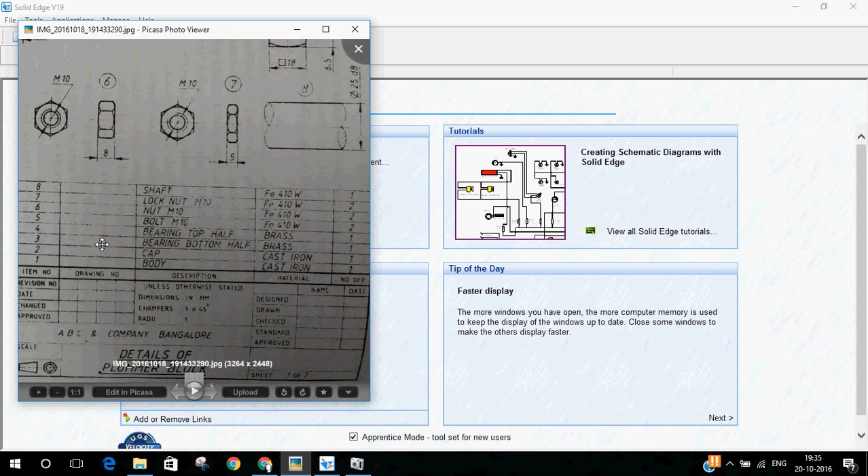In this video, I'll be doing the remaining four parts, that is a bolt, two nuts and the shaft. We'll start off with the bolt, which is the fifth part. As you can see, it is a square headed bolt, not a hexagonal head. We'll start it now.

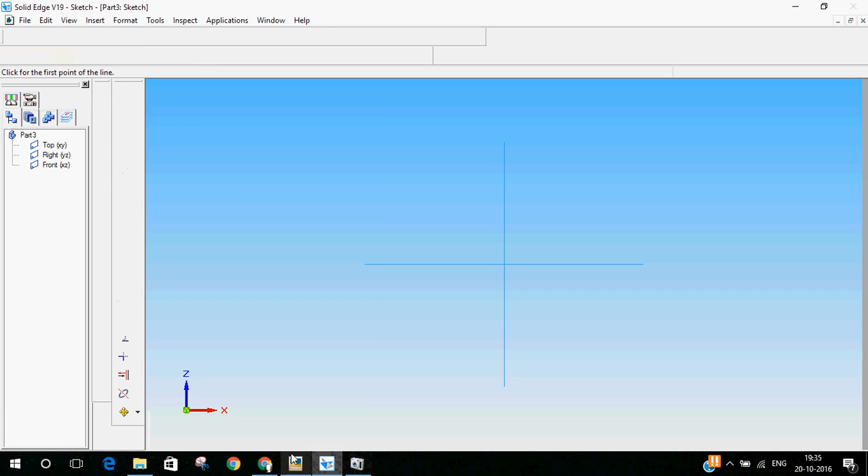I'll select the sketch on the front plane. Now we'll draw the basic dimension. This is a square bolt. So first I'll draw a square. I'll use the rectangle option to draw a rectangle first. Then I can make it a square. The dimension is 18 mm. 18. Even this should be 18. I'll make it symmetric about the axis.

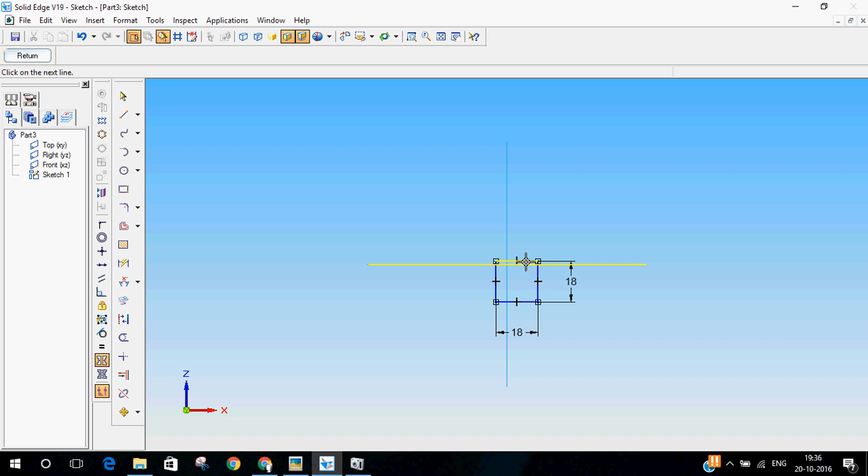Then even these two. To make these two symmetric, you will have to choose the y-axis, but already the x-axis has been selected. To change the axis, you can select the symmetric axis option and then set the y-axis as the symmetric axis. Now you can choose the two sides. Sorry, you can set the symmetric axis first, and then now select the two sides that has to be symmetric.

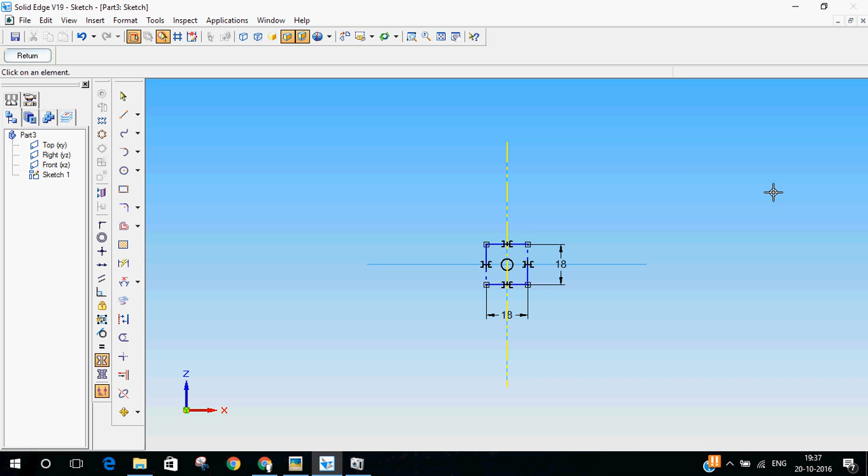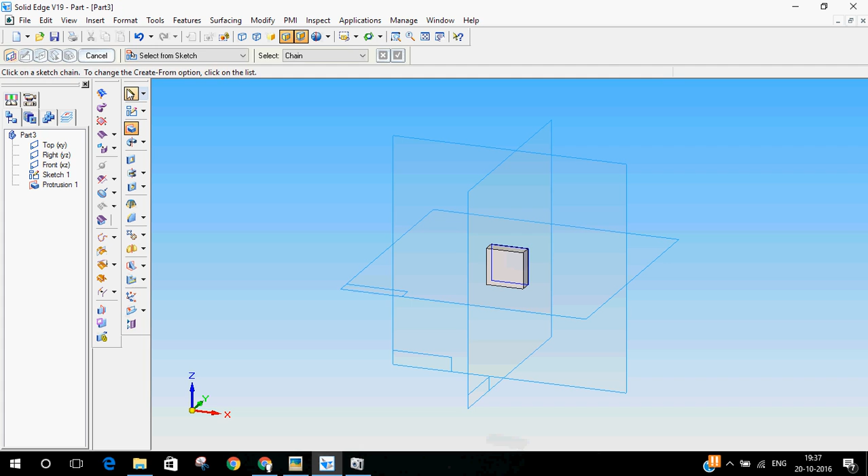So now it is done. Wait a second, there is some error there. Okay, so now this is done. Both the sides are 18 mm. I'll return from the sketch. Now the thickness of it is 6.5 mm. So I'll select the protrusion option and protrude it 6.5 mm. I'll select the sketch. 6.5. Okay, you can do it on either sides. I'll do it on the outside. So the head is done.

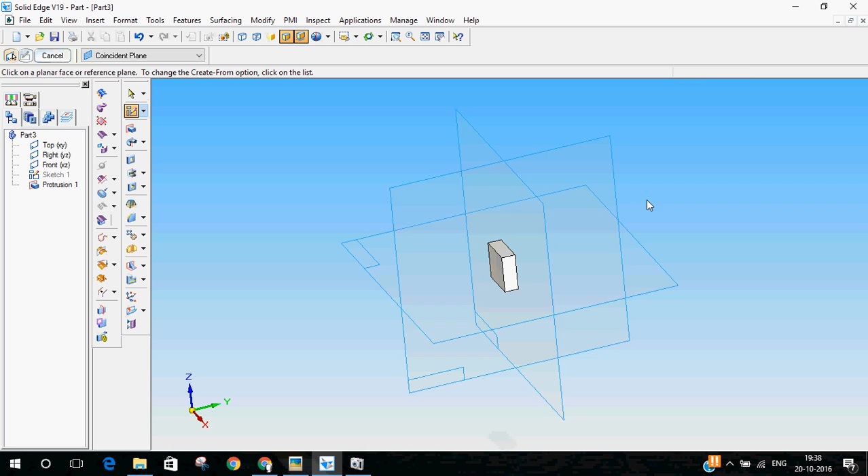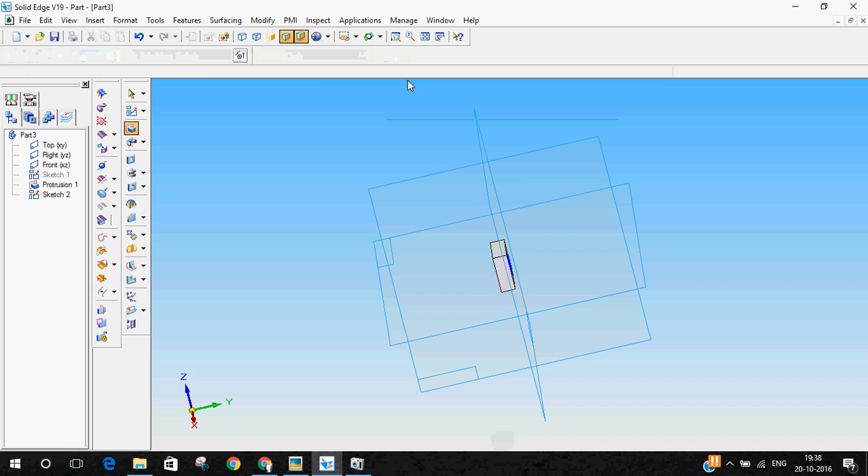Now we will have to do the shank and the threaded part. That is of a height 75 mm and the diameter is 10 mm. So again I'll select sketch on the front plane. Now I should draw a circle of 10 mm diameter. So the circle is done. Return from the sketch. Now select protrusion, select the circle, protrude it on the other side of the head for 75 mm. So this is also done.

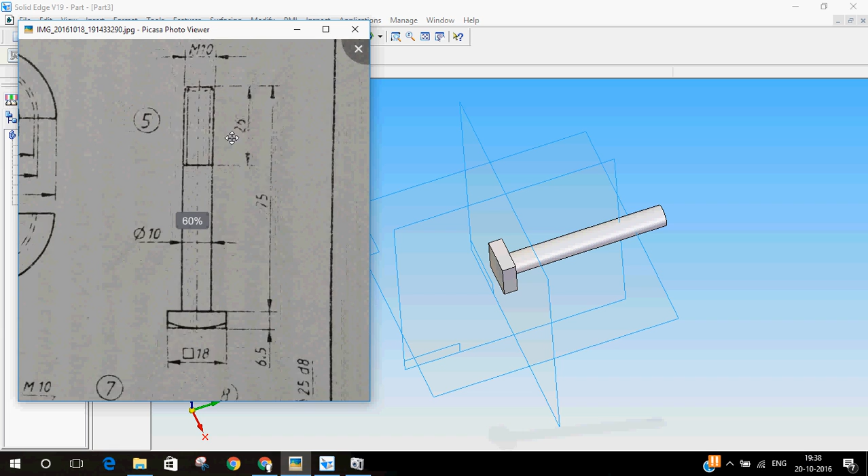Now we will have to do the threads. The whole bolt is not threaded. Only 26 mm from one edge has been threaded. So we'll do that. Under the hole command, you can see the thread option. Select the thread option. Select the straight thread. Now you will have to select the cylinder which should be threaded. Select the cylinder. Select this edge.

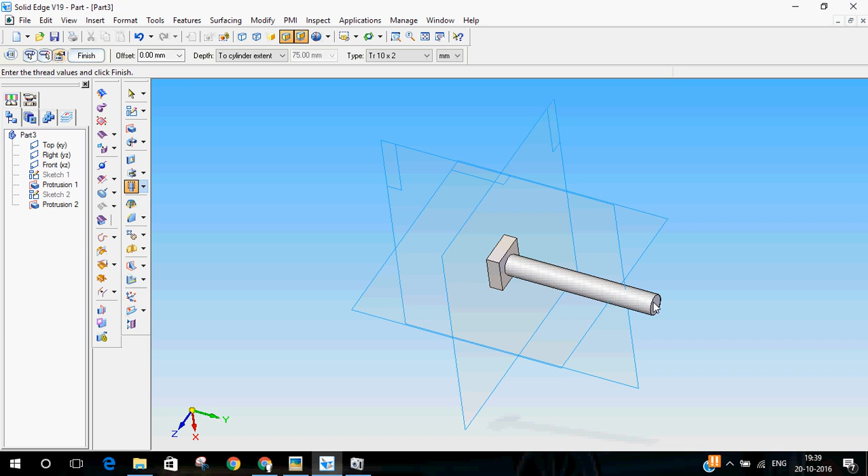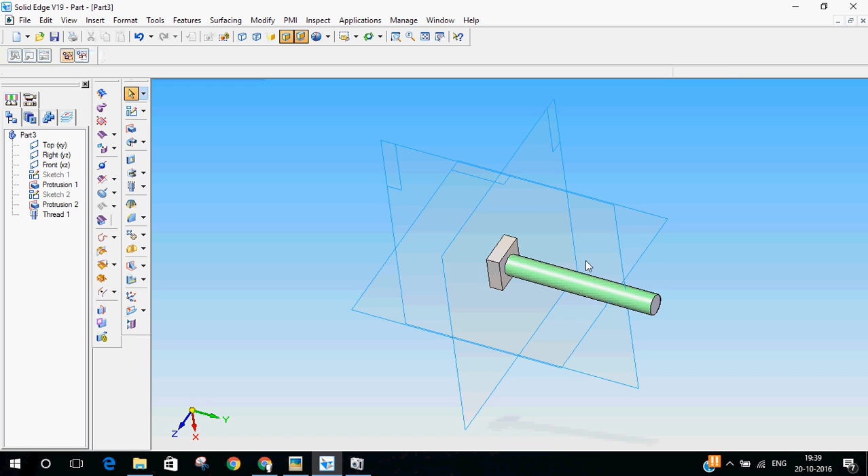Now you have to set the dimension. Offset should be 0 mm. Depth is select finite value and the distance is 26 mm. Now the type of thread is M10 and then you can click on finish. So the threads is done for a length of 26 mm and the remaining is a plain shank.

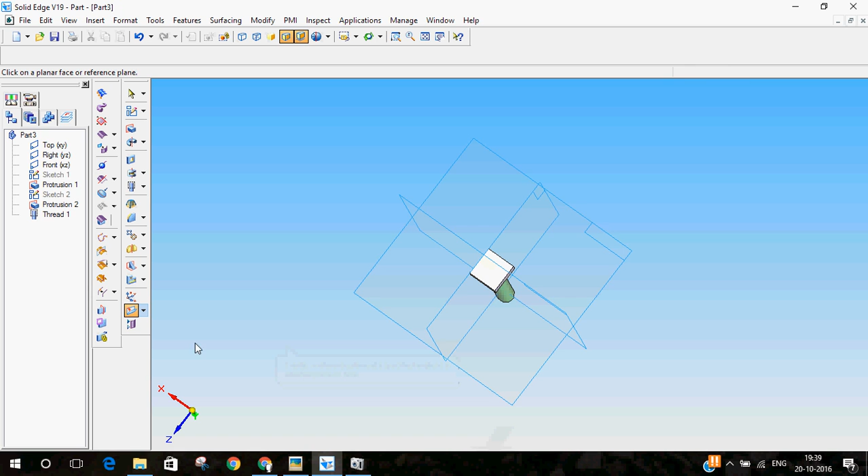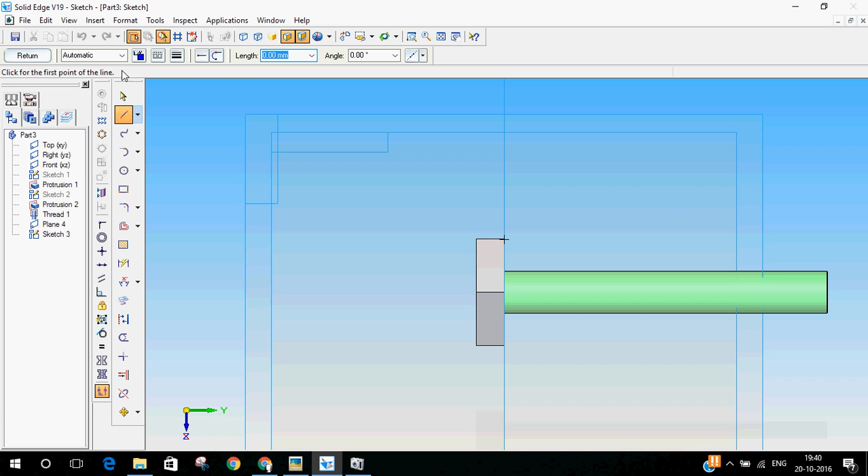Now what we have to do is we have to give this small chamfer on the bolt head. To do that, we have to create a new plane, an angled plane. Select these two planes, then a line appears in between. Click on the line. Now you can see a new plane. Create it at an angle of 45 degrees. Now select sketch on the new plane. Okay, before doing that, let the plane be there.

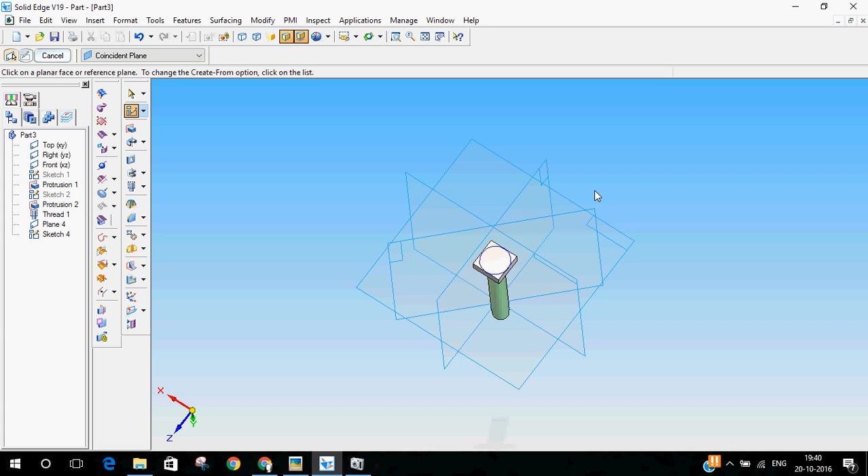Select sketch on the top surface of the square. Now draw a circle that is tangential to the edge of the square. Now return from the sketch. Now select the sketch on the new plane that you have just created. Now what you have to do is create a line. The circle which you created in the previous sketch is shown in this view also.

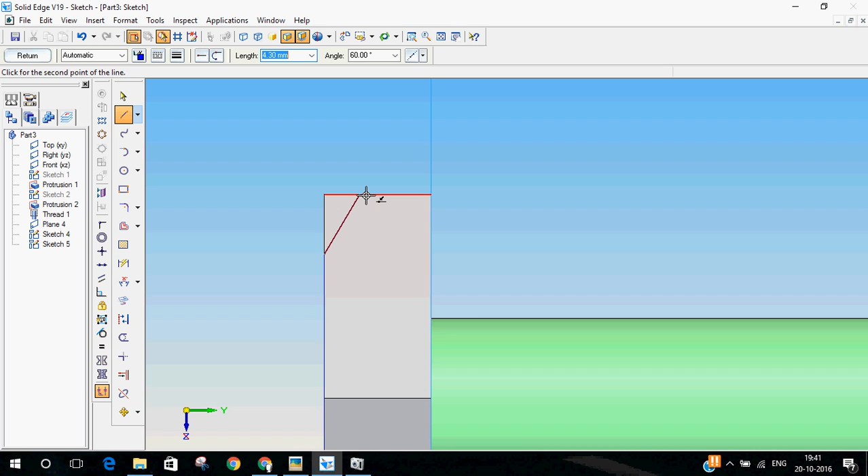From the edge of the circle, draw a line that is about 30 degrees. This angle will be anywhere between 15 to 30. I'll just choose 30. Sorry, 30 from the vertical. That means it should be 60 degrees. And then draw it till the edge. Then you can just close the profile outside the square. Now you have to draw the axis. To draw the axis, just draw it in the center. Now return from the sketch.

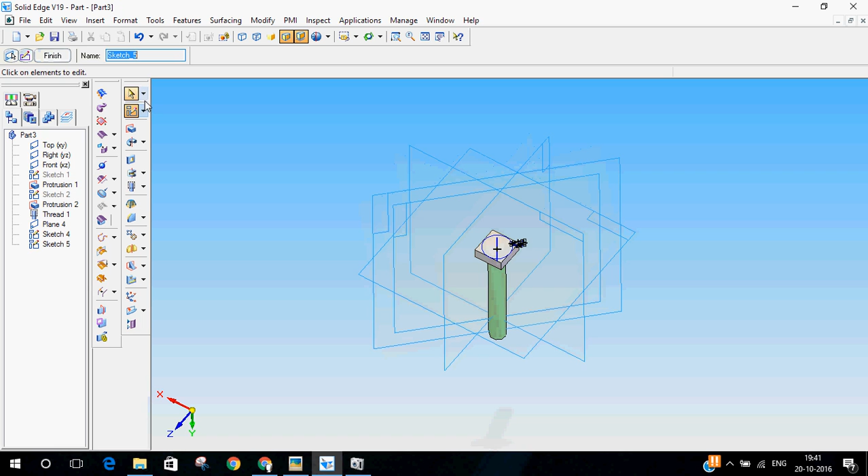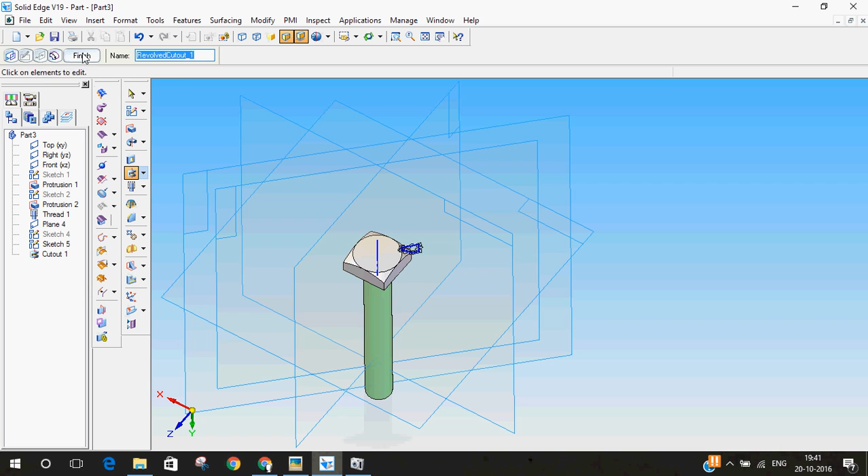Now you will have something like this. Now you can hide the previous circle sketch. Now you have to select revolve cutout. Select this profile and select the center line as the axis. Then revolve it for 360 degrees. So this is also done. Now you can see we have got that chamfered look which is shown here. Okay, so the bolt is done now.

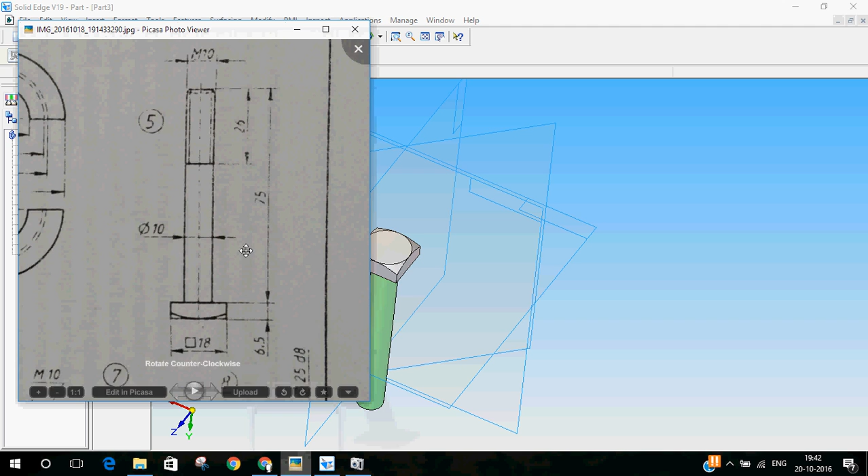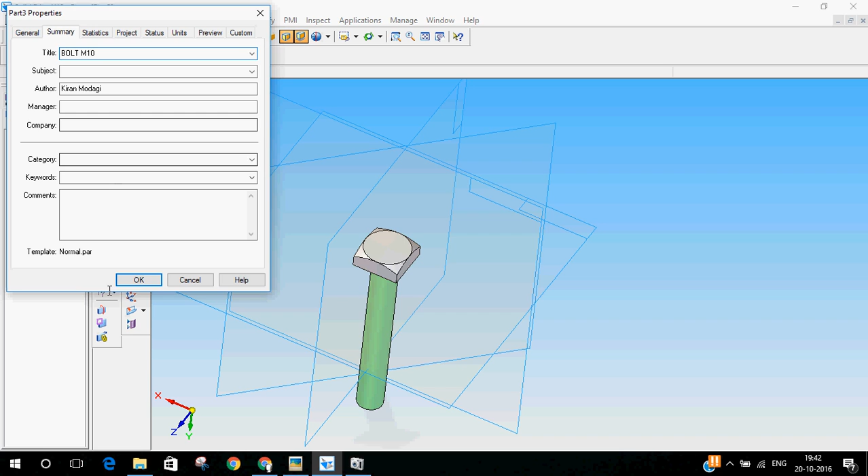We'll set the material and save it. The material is given to be FE410W for all the 4 parts. So let me set the material. It is FE410W. Now I'll save it. The name is Bolt M10. Okay, so the bolt is done now.

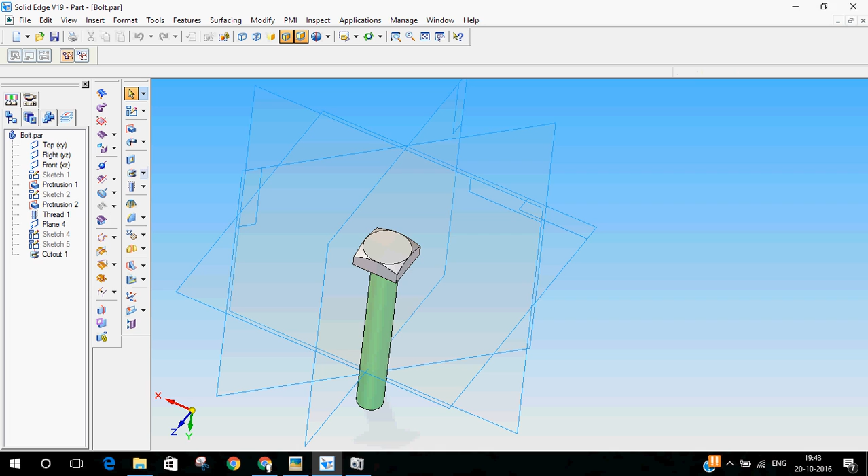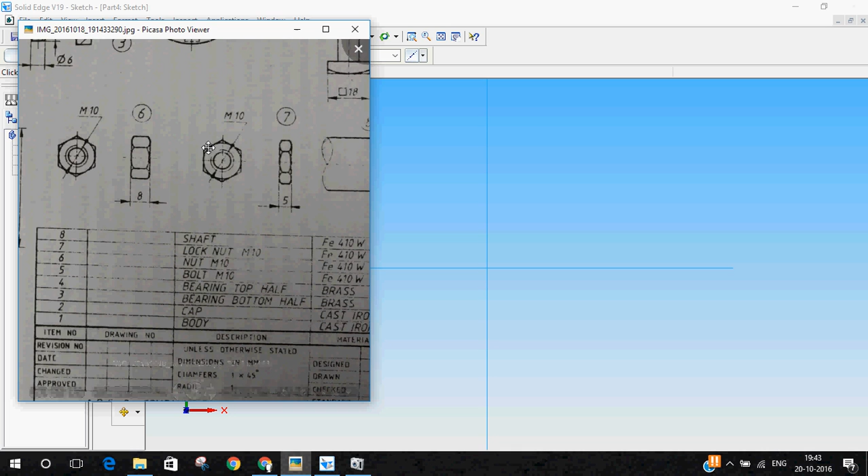The next is 6th part, that is the nut. I'll close this and select a new solid part. Now we'll do the nut. There are two nuts which have the same profile and dimensions, but only the thickness vary. So what I'll do is we can use the same profile to do both the nuts. To do that, first select sketch on the top plane. As you can see, it is a M10 nut. So draw a circle of 20 diameter.

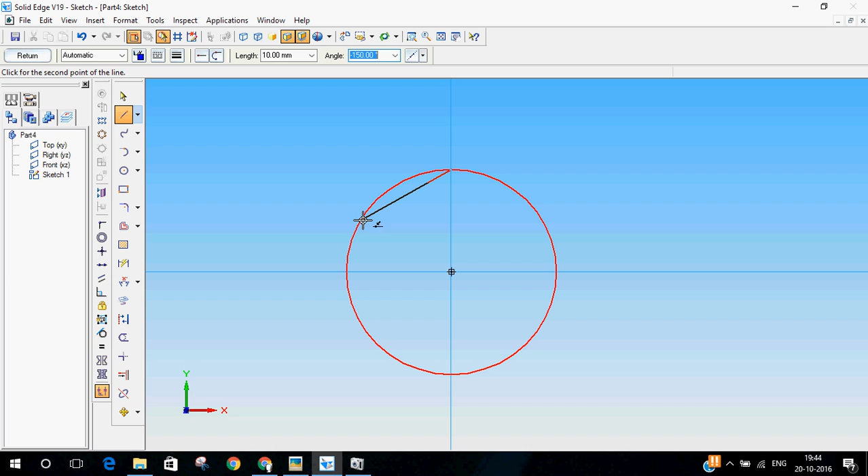And then now zoom into it. Then we have to draw a hexagon inscribed in this circle. Now select the line command. Start from the top of the circle. Give dimension to be 10 mm. And then click on the circle. You can see the angle is 150 degrees. And then go vertically down till it touches the circle again. Then continue it till you finish the whole hexagon.

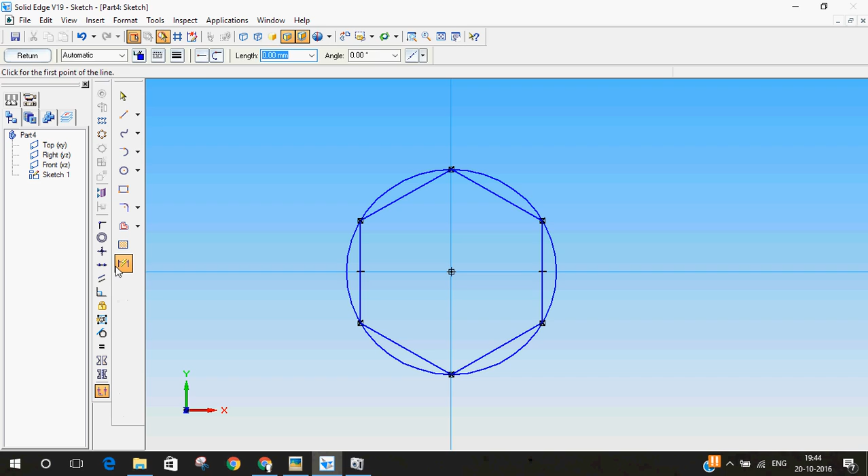So the hexagon is done now. Now I don't need the circle anymore. I'll just delete it. Return from the sketch. Now select protrusion.

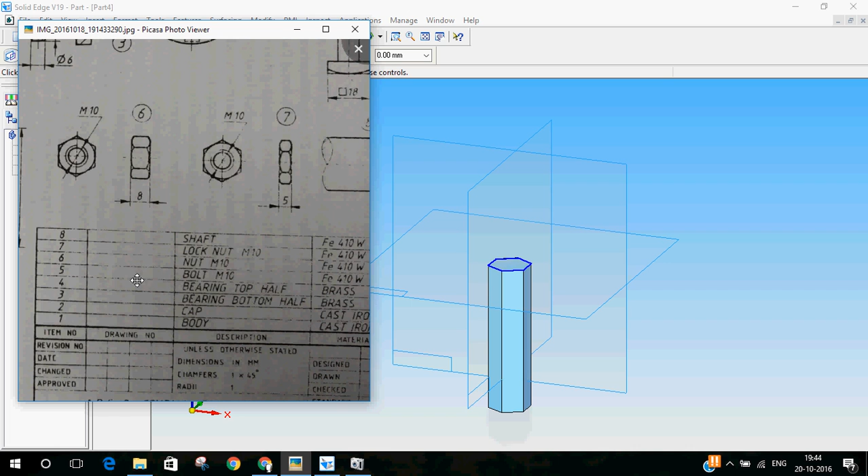The protrusion width or the height, for the 6th part, is 8 mm. So I'll protrude 8 mm on both sides. Select 8. Okay, 8 mm is done. Let me hide the sketch. Now we have to create an M10 hole on it.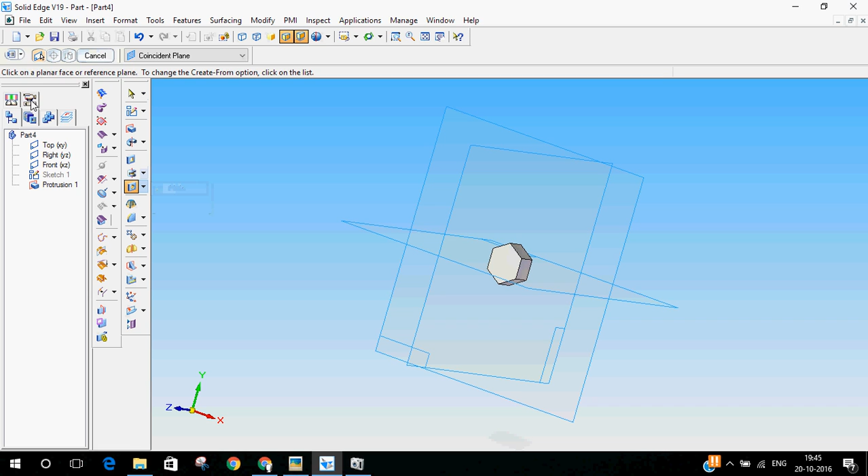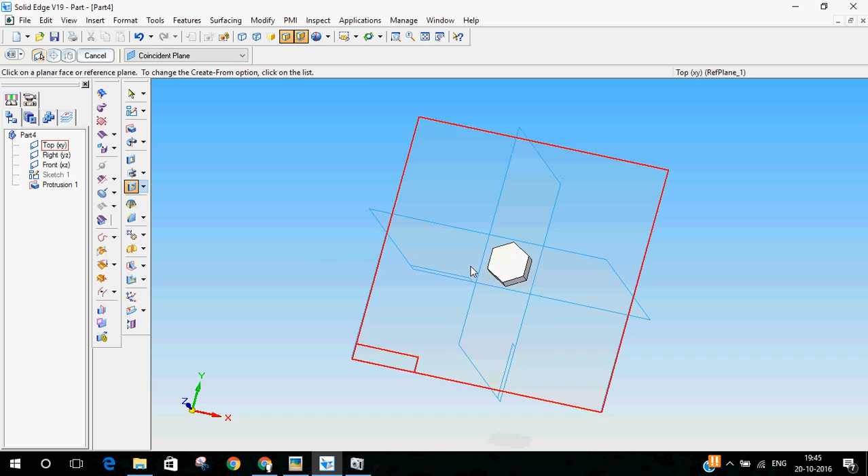To do the M10 hole, go to the hole option, click on the hole options. Now select threaded hole. The thread is M10, and tick the through hole extent option. Now select the face and place the hole on the center.

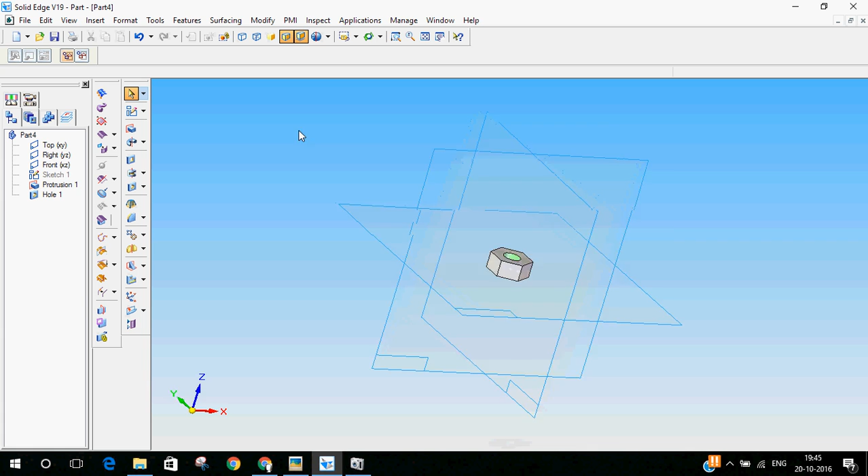It is asking for direction. Select the downward direction and you will be done with the hole. Okay, so the hole with internal threads has been done. Now we will have to give this chamfer around it, as you can see there. Again, you have to create a new angled plane.

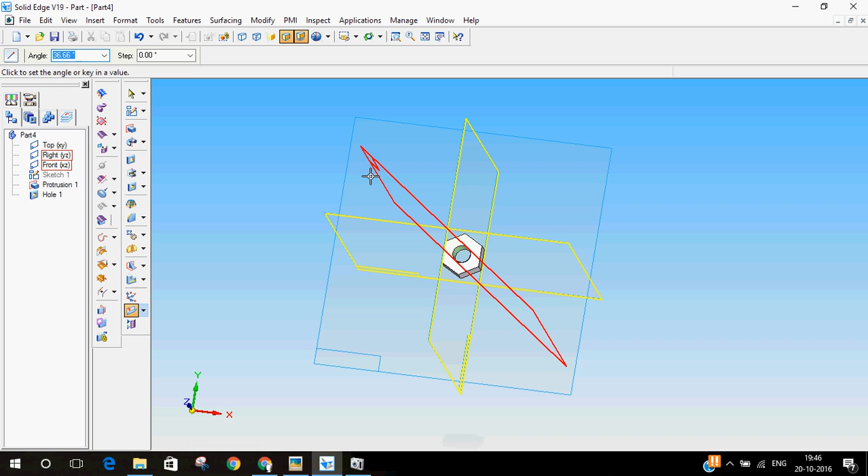Select angled plane, select these two planes and the line which appears between them. Now you can give an angle of 30 degrees. Okay, so I've given 30 degrees. You can place it anywhere. So the new plane is done at 30 degrees. As you can see, it goes through the diagonal of the hexagon.

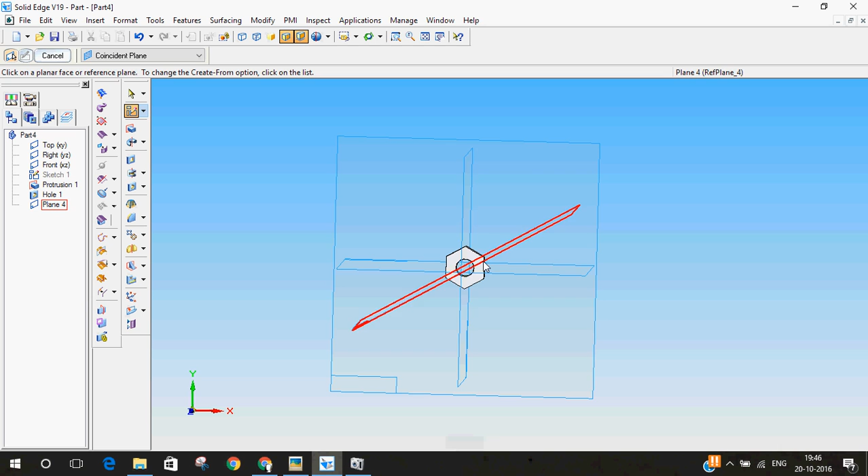Okay, actually no need to create this plane also. You could have selected this plane which also goes through the diagonal of the hexagon. Now select sketch on the top plane of the nut. Now inscribe a circle inside this hexagon. If you just go to the edge, it will select tangent and then you can click anywhere to finish it. Now you have a circle.

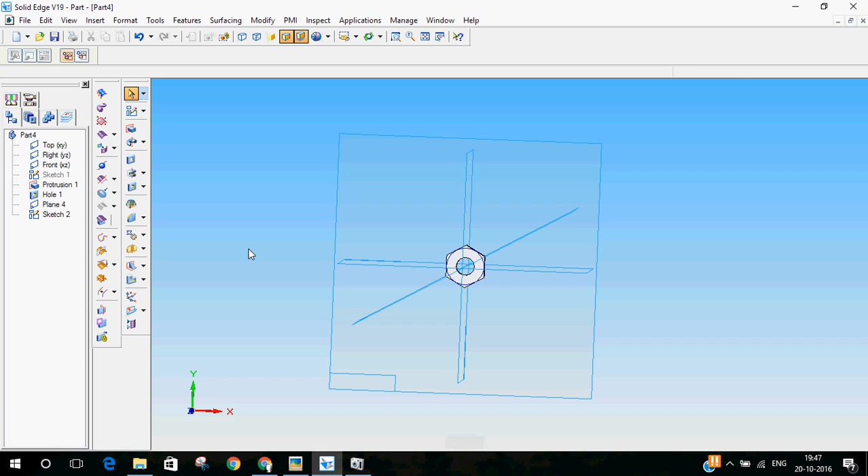Now select a plane that goes through the diagonal. You can select the newly created plane or the existing right plane. So I'll select the newly created plane, go to sketch. Now do the same thing we did for the square headed bolt. You can see the projection of the circle here.

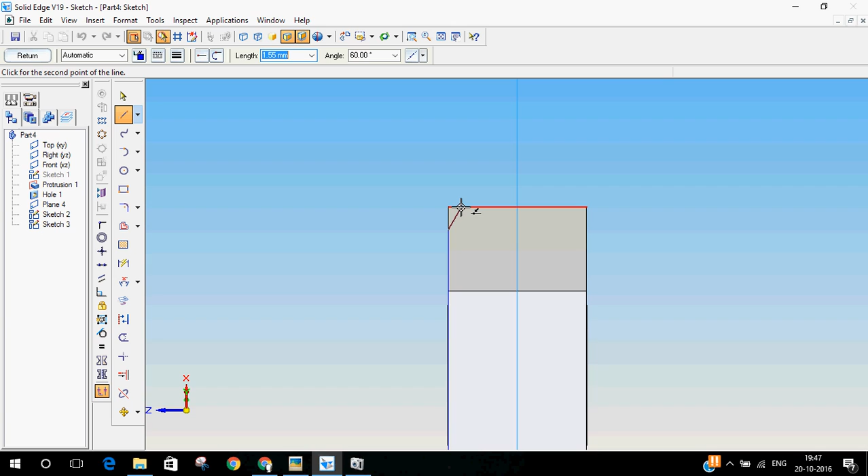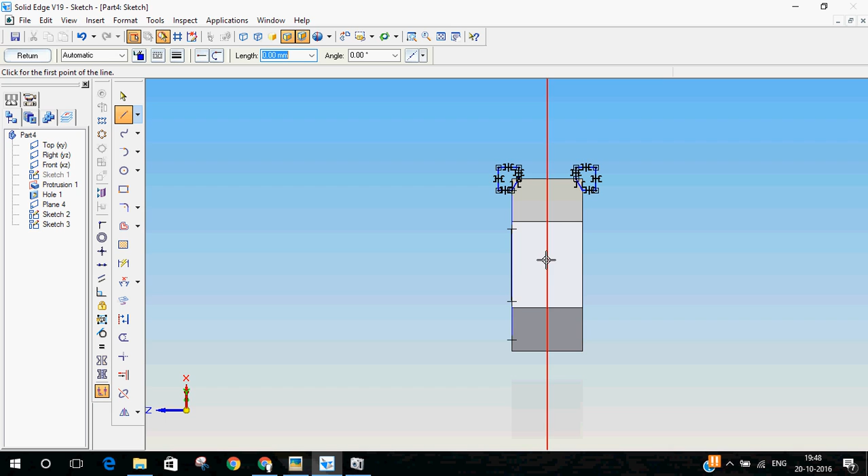From the edge, select a line that will be at an angle of 60 degrees. Okay, so you got it now. Click on this edge. Now close the profile. Now since the chamfer is on both sides, you can mirror this about the central axis. Now we have to give an axis for this to revolve. So I'll select this midpoint and draw an axis. Now return from the sketch.

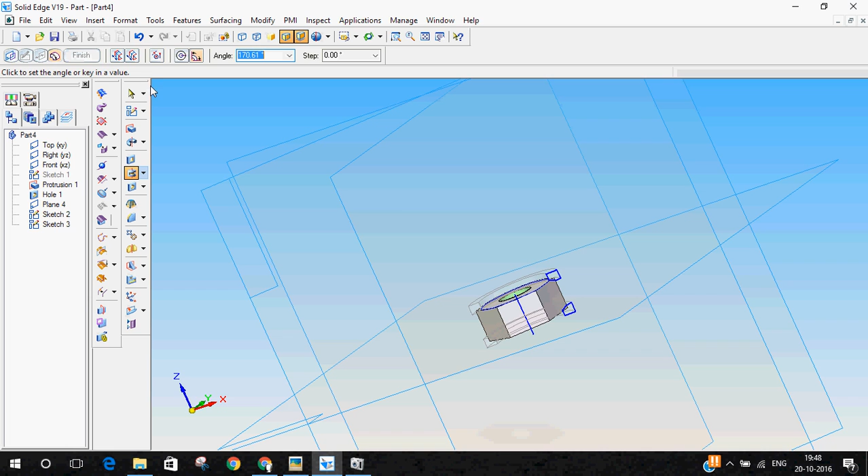Select the revolve cutout option. Now you can select these two profiles and select this as the axis and then cut it out for 360 degrees. Let me hide all the sketches. So now you can see we got that nice chamfer on both the sides.

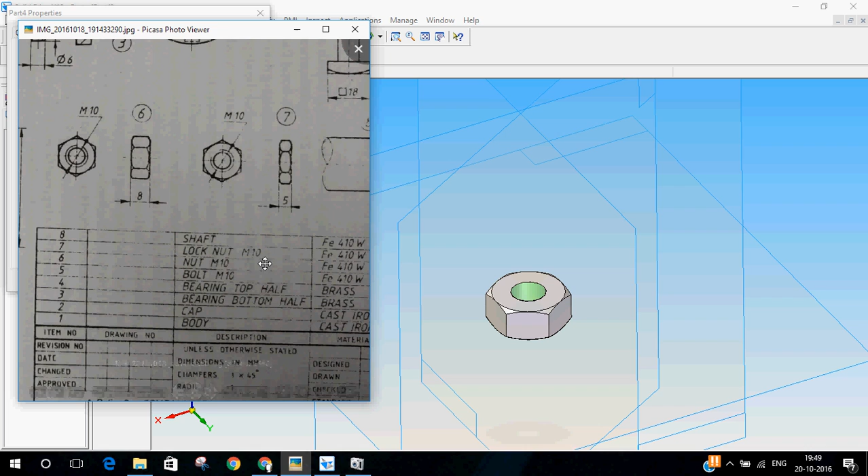Let me save this now. First I'll assign the material. It is FE 410W. Name is nut M10. Okay, so the nut is done.

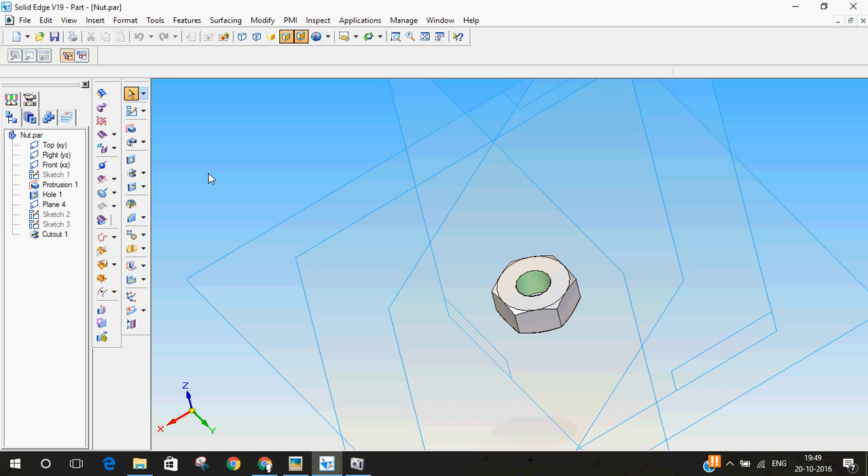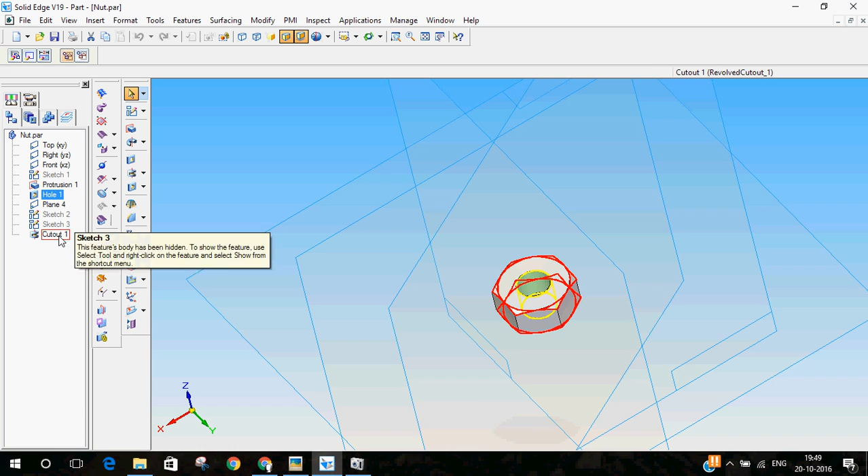To do the second nut, no need to do everything again like drawing the hexagon and all. You can just delete these things till the protrusion. No need to delete the protrusion also. Delete everything till the hole. Okay, so now you are left with the protrusion.

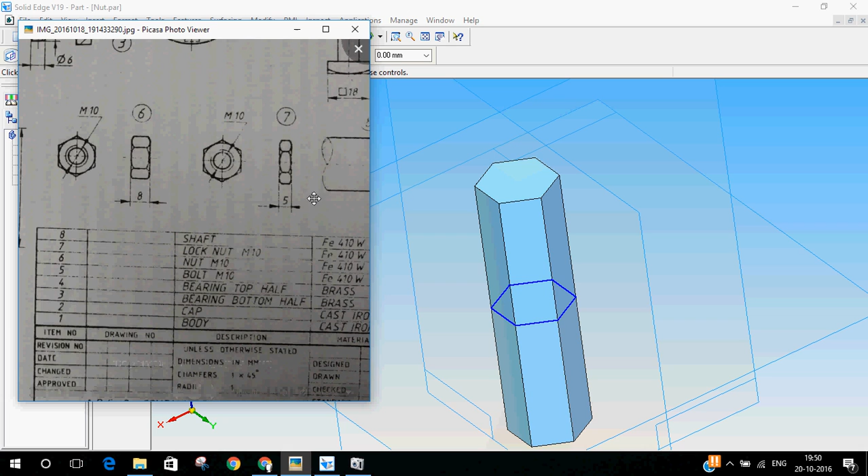Now select protrusion, click on edit definition. You can see you have all the steps that you did while you created the protrusion. Select the extent step, then you can extend it again. The new one is for a thickness of 5 mm. So select 5 and then the height is changed. Now you can follow the remaining steps. You can create the hole now.

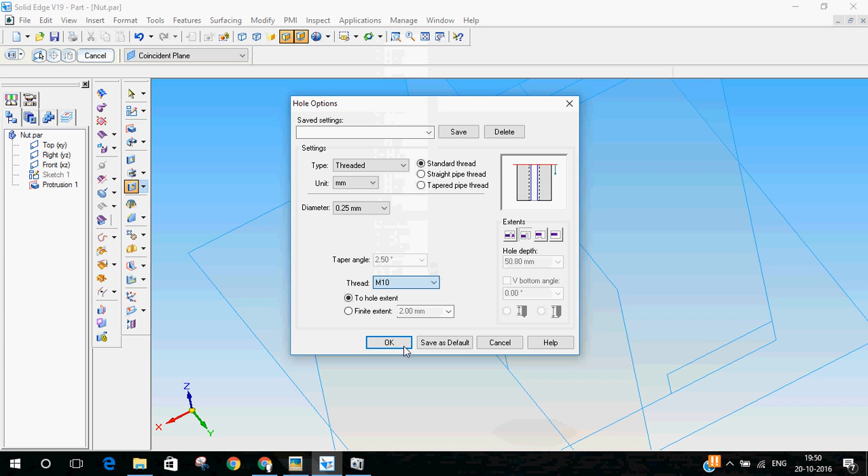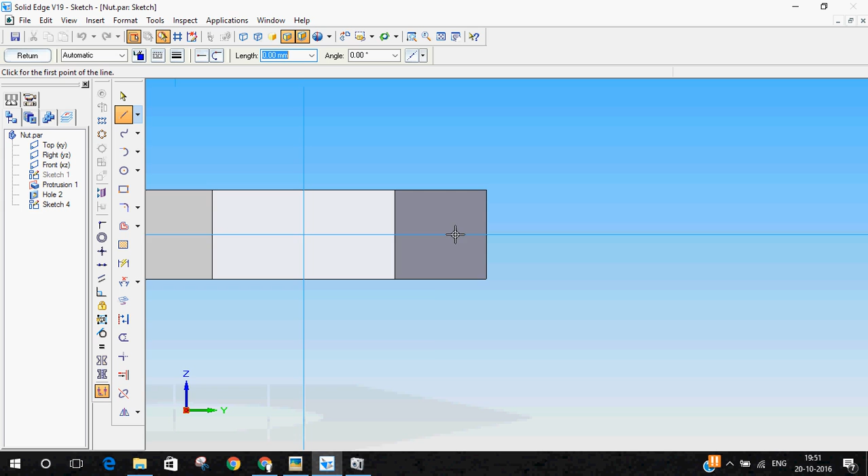M10. Okay, the hole is done. Select sketch on the plane that passes through the diagonal. That is the right plane. Okay, I had to draw a circle first. Now select sketch on the right plane. Now you can draw that small line for chamfer.

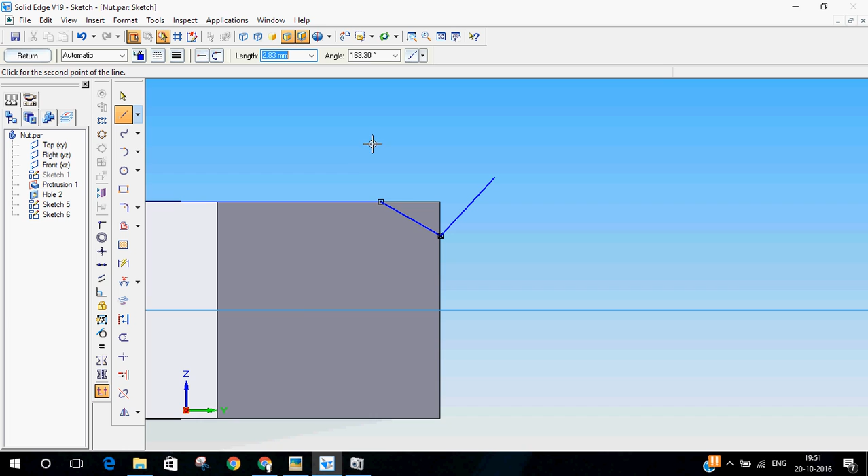Now this angle should be minus 30 here. Sorry. Angle is minus 30 till this edge. You can close it any way you want. Now let me mirror this. Then draw a line for the axis. Now again perform a revolve cutout option.

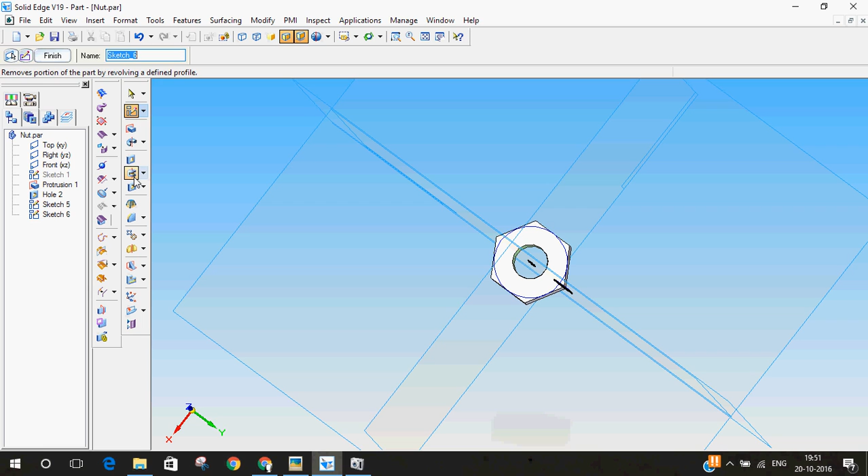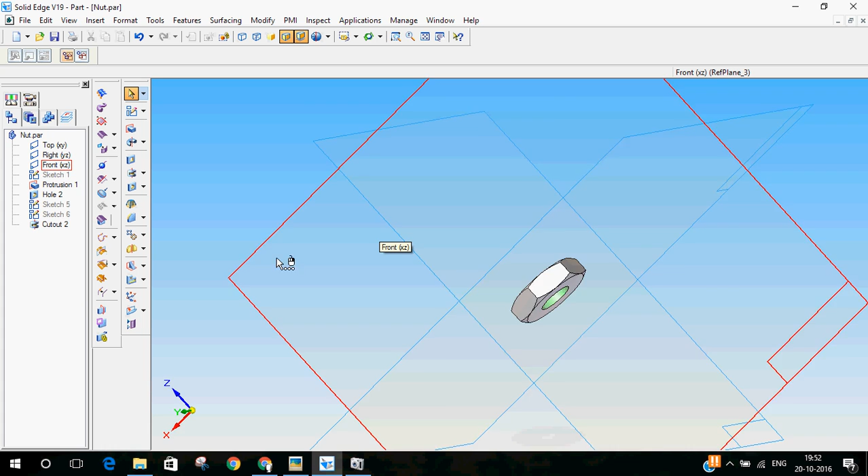Okay, so we have the lock nut ready, which is 5 mm thick. So let me save this. Material has already been assigned since I'm modifying the existing part. Now what you have to take care of is click on save as and then save it as a new one. I'll select lock nut.

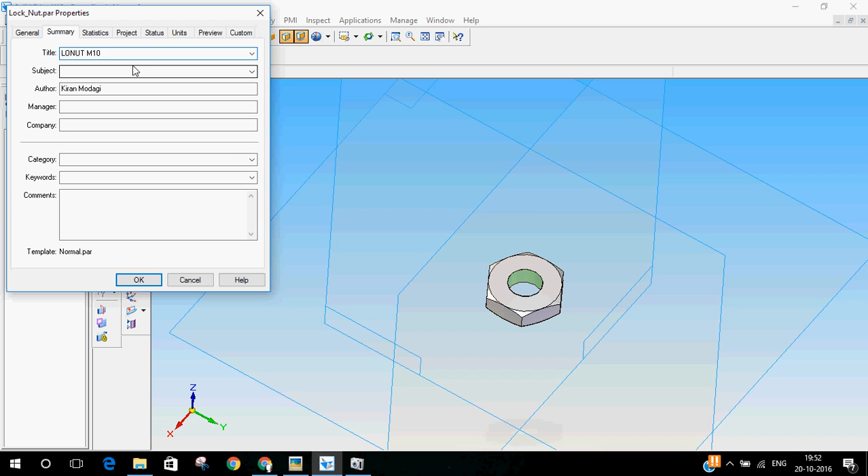Okay, I've saved it. Now I have to change the name. Go to file, file properties and change the name under summary. Okay, so this has been done. Now click on save. So this has been saved.

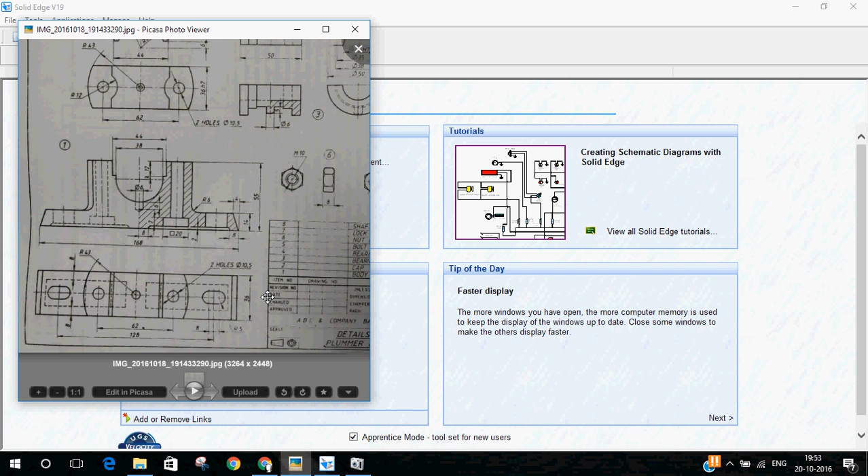Now the last part is the shaft, which is a very easy part. The diameter is 25 and the length is not mentioned. The shaft goes through this actually. This thick width is 36 mm. So the length should be more than 36. I'll make it 50.

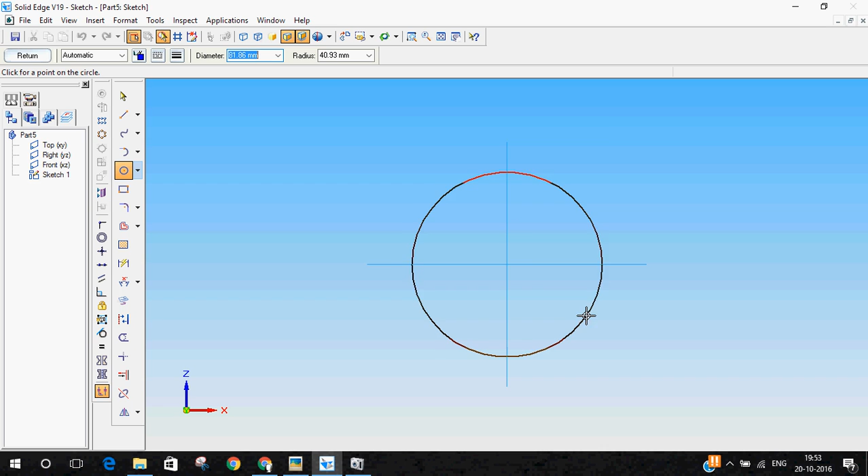Select any plane you want. Draw a circle of 25 mm diameter. Let me see if it's 25. Yes, it's 25. Then return. Select protrusion on both sides. Length, let it be 50 mm. Okay, so even this is done.

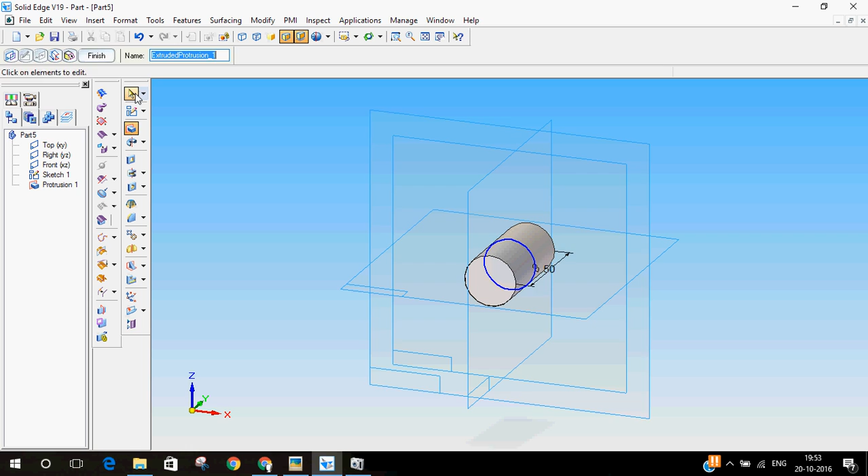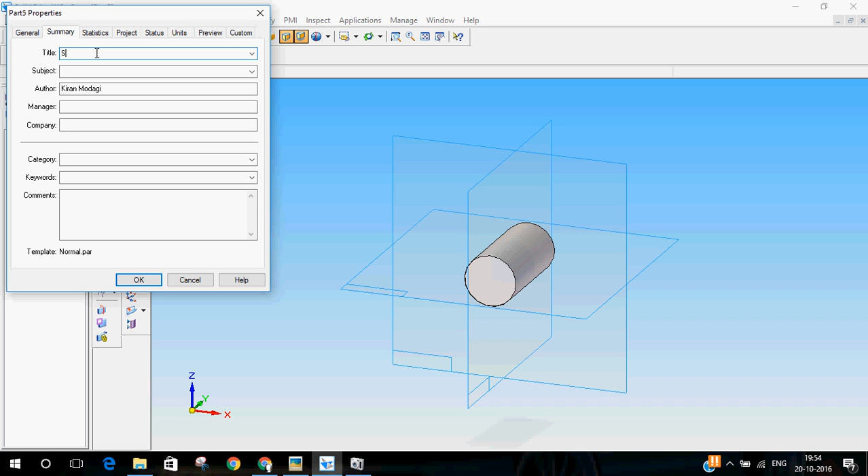Let me set the material, FE 410W. I'll save this now. Okay guys, so all the parts have been modeled. Now the last step remaining is the assembly. I'll be doing that in the next video.